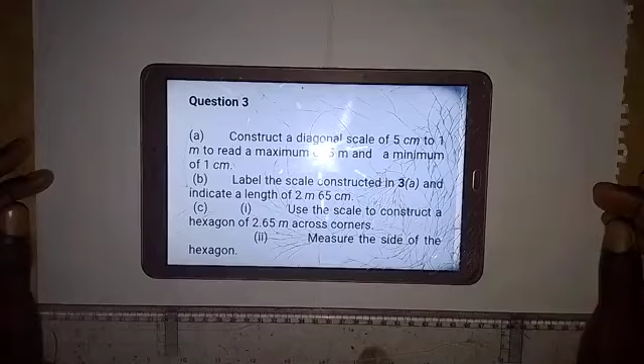B, and question C to answer here. Question A says construct a diagonal scale of 5 centimeters to 1 meter to read a maximum of 5 meters and a minimum of 1 centimeter. Question B says label the scale constructed in A and indicate a length of 2 meters 65 centimeters. Question C, Roman figure 1, says use the scale to construct a hexagon of 2.65 meters across corners. Roman figure 2 of question C says measure the side of the hexagon.

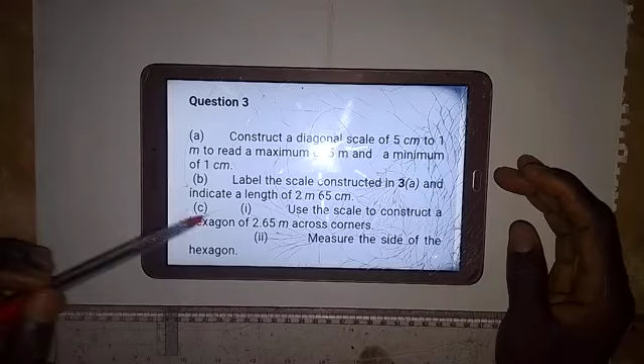Alright, so these are the questions that we are going to be working on. We have to start with question A, so that whatever we do here in question A, we are going to use to answer question B and question C together.

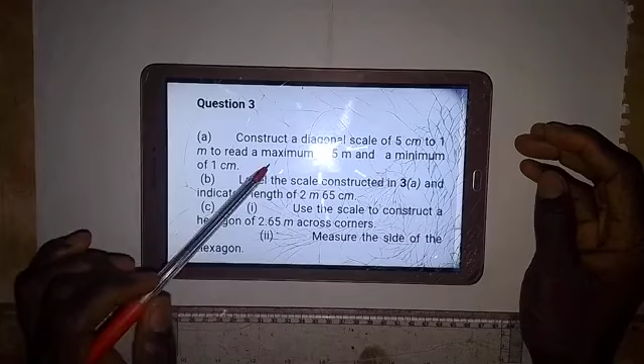Question A, as we have here, we have to construct a scale of 5 centimeters to 1 meter. So it means that we are using 5 centimeters to represent 1 meter. Then we need to determine the length of the scale. As we have here, the maximum reading that we have to have on the scale is 5 meters.

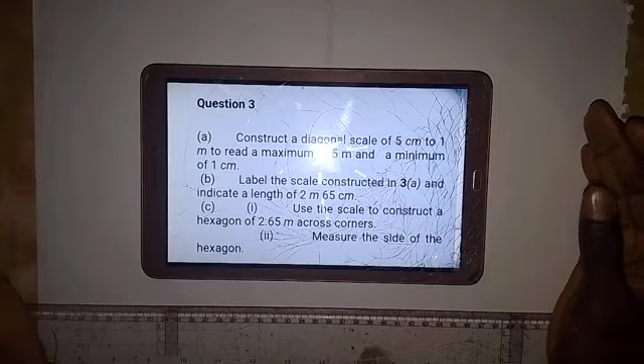So for every 1 meter, we are representing it with 5 centimeters. So what does that imply? Length of scale is 5 centimeters times 5. So if 5 centimeters is representing 1 meter, the length of scale will now be 5 centimeters times 5, which will give us 25 centimeters. That is the length of scale. That's the first thing that we are going to make use of.

So let's start and see how this construction can be done. The first thing that we are going to do is draw a horizontal line. So we have this horizontal line here. On this horizontal line, I'm going to draw a vertical line. Just move away a bit and draw a vertical line around here. So we have a vertical line here. We need this space on this side, so we draw this vertical line.

On this horizontal line, I'm going to take a measurement of 25 centimeters, using this set square to take the measurement. So this is 10 centimeters, that is 100. But we are using centimeters in this case, as the length of scale is 25 centimeters. From this point we also have another 10 centimeters, so that's 20 centimeters. Then I will take a measurement of 5 centimeters in addition to these 20 centimeters that I've taken, so this is 5 centimeters here.

I need to extend this line, so we extend the line. The total length here now is 25 centimeters, which is the length of scale. As I've said, we are using 5 centimeters to represent 1 meter, and we are told the maximum reading should be 5 meters. So if we are representing each meter by 5 centimeters, the length of scale will be 5 times 5 centimeters, which is equal to 25 centimeters. So that's what we have here.

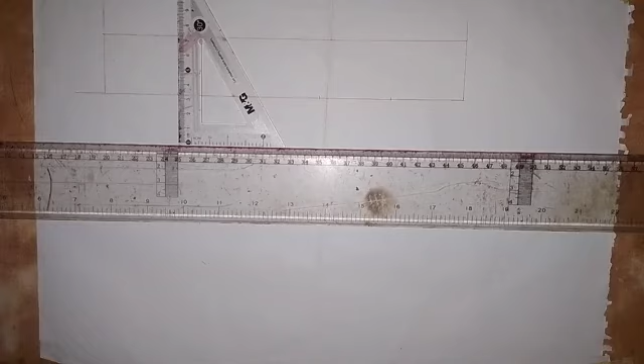At this point here, I'm going to draw a horizontal line from here to this end. So we have formed the rectangle as you can see here, and on each of these points I'm going to erect a vertical line. I will be making it a thick line on each of these points.

So we draw a vertical line here, and then coming to this point, I'll also draw a vertical line at this point. Okay, so we have this. Then at this point I will also draw a vertical line. Okay, then coming to this point, we also draw a vertical line here.

Okay, so now we are going to number each of the points, but the first one that we have here, we are going to make it 0. Then you write 1 here, so this is 2. Then this is 3, and here we have 4. All right, so this is how we are to number it. The first division, you put 0 there, and you number the rest as I've done it here.

So each of these divisions that we have here represents 1 meter, as we are told that we are using 5 centimeters to represent 1 meter. Now the next thing that we are going to do is divide this into 10 equal parts, because the highest unit is meters. Then before meters we have decimeters, and before decimeters we have centimeters.

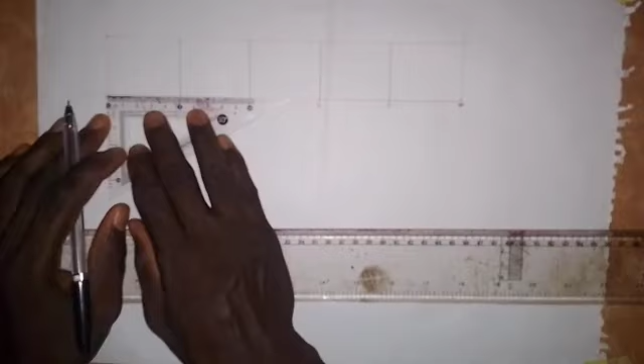So just look at what I'm going to do here. We are going to divide this 1 meter into 10 equal parts, because 10 decimeters is equal to 1 meter. So we divide this 1 meter into 10 equal parts. Don't forget that we have 5 centimeters here, and this 5 centimeters represents 1 meter.

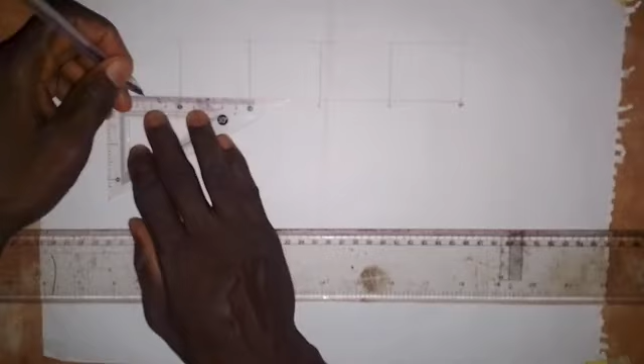So if we divide 50 millimeters by 10, that will give us 5 millimeters each. So this is 1, this is 2, and then we have 3 here, this is 4, this is 5, this is 6, this is 7, here is 8, here we have 9, and this is 10.

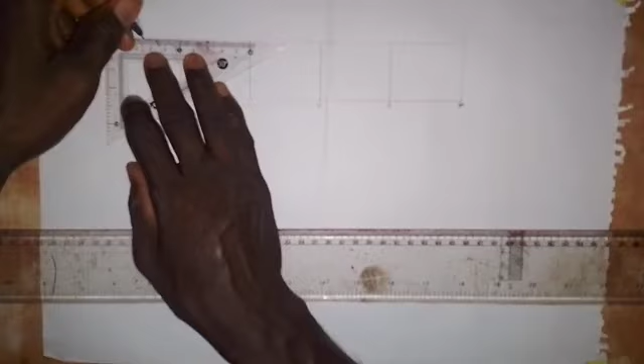Because we are constructing a diagonal scale, we also need to do the same thing up here by dividing this into 10 equal parts. So this is 1, 2, 3, 4, 5, 6, 7, 8, 9, and then we have 10. So this is a diagonal scale.

So what we are going to do now is connect this point 1 up here with 0 here, so that makes it a diagonal scale. So we draw a line from here to here. And I will now connect these 2 with this one here, like this. Then we come to this point and connect these 2 points together, so it has to bend, like a diagonal on a rectangle.

Then we also connect these 2 points together like this. Then we connect these 2 points, and these 2 points, and these 2 points, and lastly we connect this point together with this point. Okay, so look at what we have. This is what makes it a diagonal scale.

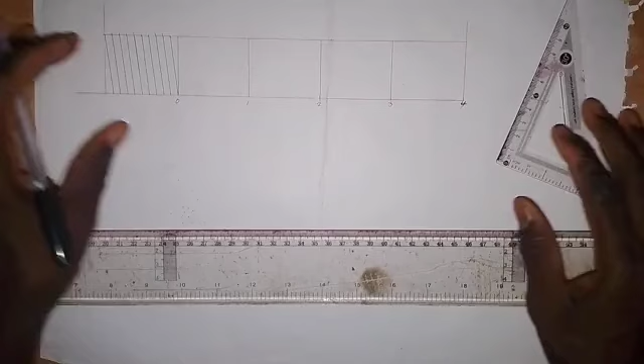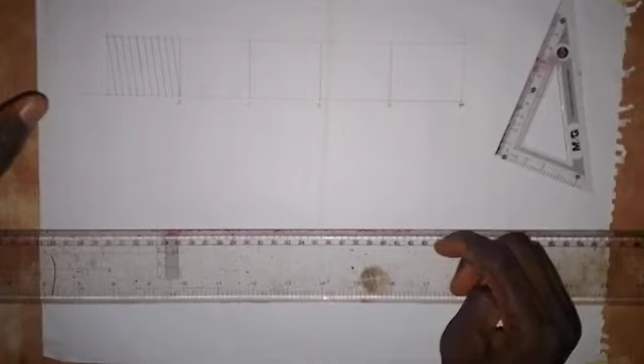The next thing is that we now need to create the centimeters part. This part here is for meters, while this one is for decimeters. Now we want to create that of centimeters here, as we know that 10 centimeters is equal to 1 decimeter. Since we took 40 millimeters or 4 centimeters here, we are going to divide it into 10 equal parts so that we can have centimeters on this part.

So 40 millimeters divided by 10 will give us 4. So I'm going to take a measurement of 4 millimeters each. This is 4, then 8, then 12, then 16, 20, 24, 28, 32, and 36. All right, so we have divided it into 10 equal parts.

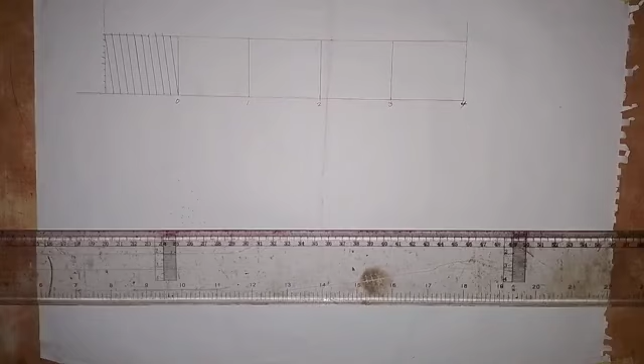So the next thing that we are going to do is draw a horizontal line through each of these points.

So through each of these points, we draw a horizontal line. So we take a horizontal line from this point to this end here. And then from this point, we also draw a horizontal line to this end. Then we come to this point. We also draw a horizontal line from here to this end here, and we do the same thing for this.

Draw a horizontal line from here to the end, and then here we draw a horizontal line from here to the end here, and then we also draw a horizontal line here, from here to the end. Okay, so we go on. So we draw a horizontal line from here. And then next, we draw a horizontal line from here. And then coming up here, we also draw a horizontal line from here to the end.

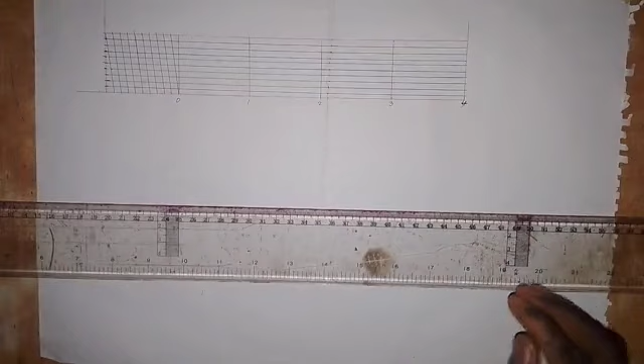Alright, so we have the centimeters part here. I'm going to make this line a thick line, because this is the major length or scale that we are given. Okay, so we have it like this.

Then numbering this one now, this is 0, this is 1 and 2, so I will put 2 here. Then 3, 4, I will put 4 at this point, and then 5, 6, I will put 6 here, and 7, 8, I will put 8 at this point, and this is 10. On this also, this is 1 and this will be 2. I'm going to put 2 here, 3, 4, so I'll put 4 here, and 5, 6, I'll put 6 here, 7, 8, I'll put 8 here, and then we have 10 here.

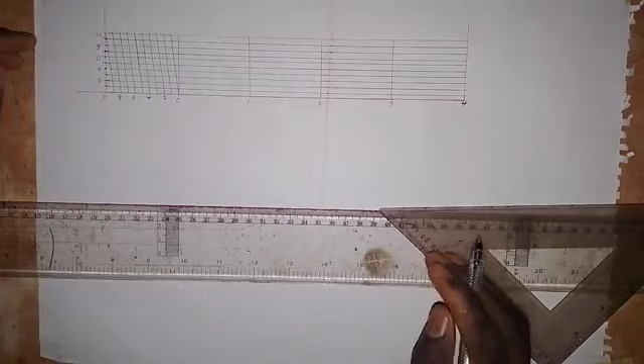Next, I have to write the unit on this scale. I'm going to write meter here, and then here we have decimeter, and here we have centimeter. I will do that while I pause the video, and when I'm done, you will see what I've done. Alright, so here I've written the unit. Here we have meters, this is decimeters, and we have centimeters here.

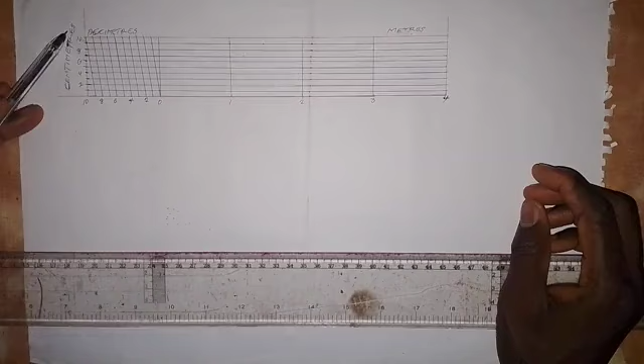Now let's answer question B. We have answered question A by constructing this diagonal scale. Question B says we are to label the scale constructed, and then we are to indicate a length of 2 meters 65 centimeters. So we have labeled the scale. What we have to do now is to indicate a length of 2 meters 65 centimeters.

It's very simple. This is 2 meters here, where we have this 2, as I said each of these represents a meter. So this is 2 meters here. Now we look for 65 centimeters. That's going to include these decimeters. So we are going to count from here.

6: 1, 2, 3, 4, 5, 6. When you get to this 6, you now go up on centimeters to count 5. So we have 1, 2, 3, 4, 5. This is where we have 5. So we are going to take note of this point by shading it, just put a visible dot on this.

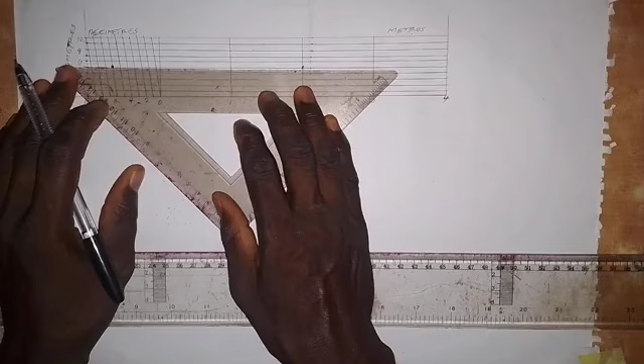What I'm going to do now also, by following this line, I will also take note of this point, as we have it here. Now I'm going to make this line a more visible, thick line, to show the distance of 2 meters 65 centimeters on this scale. So this is what we have here now.

So that is the distance. Then I'm going to write it on it. This is 2 meters, 65 centimeters. So we have to write it here. So we have indicated that distance or that length as we are told.

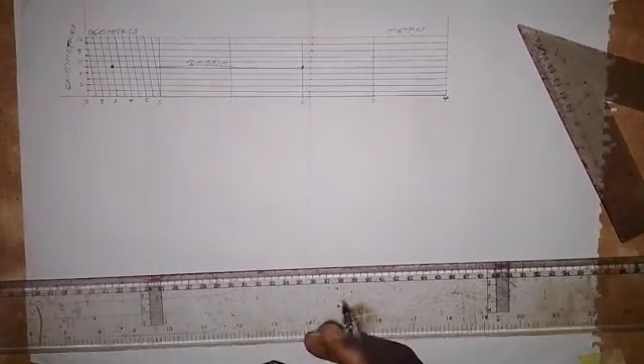All right, so we have answered question A and question B. Question A is for us to construct the scale, while question B is for us to label the scale, which we have done: meters here, decimeters here, and centimeters here. And part of question B is for us to indicate a distance or a length of 2 meters 65 centimeters, which I have done here.

Now let's move to question C, which says we are to use the scale to construct a hexagon of 2.65 meters across corners. So the distance across corners is given as 2.65 meters. What we are going to do now is draw a horizontal line. So we are going to draw a horizontal line here.

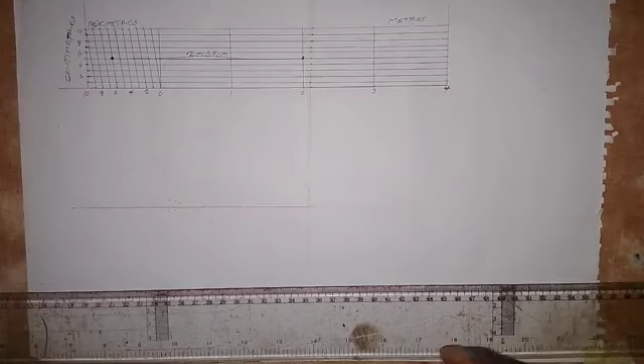So we draw a horizontal line. So this is the horizontal line as we have it here. The next thing that I'm going to do is take this distance so that we can transfer it here, because that's going to be the distance across corners that we are given. So I'll take this distance. This distance is 2.65 meters.

So here I'm going to put it somewhere here, then I will make an arc on the line. Then bringing it back here to this point, I will also make an arc here. So I've transferred this distance from here to here. The next thing I'm going to do, before we can construct the hexagon, is bisect this distance.

Let's call it distance AB or length AB. That is the distance across corners of the hexagon. So I'm going to bisect it by putting the pinpoint of my compass here and extending the pen point of the compass. I will draw an arc up here and an arc down here, and then bring it to point B. I will also draw an arc up and down.

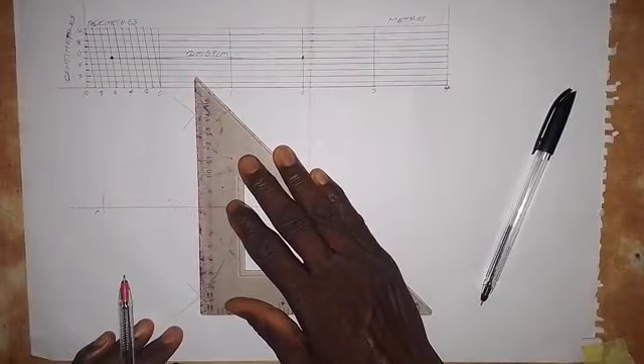So we have this. The next thing I'm going to do is draw a line through this point, that is the bisector of length AB. So I will draw this line like this. We have bisected the line. Next, if this is the center, I will call this point O. I'm going to put the pinpoint of the compass at point O and extend to B or A, which is the radius of the circle that will give us this hexagon.

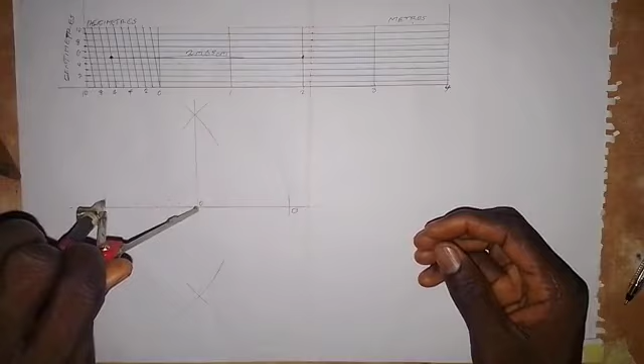So I'm going to draw a circle all around like this. The circle goes as we have it here. The next thing I'm going to do is take the radius we used to draw this circle and put it at point A here. I'll make an arc up and down. Then I'll also put it at this point and make an arc up and down. So we have this point.

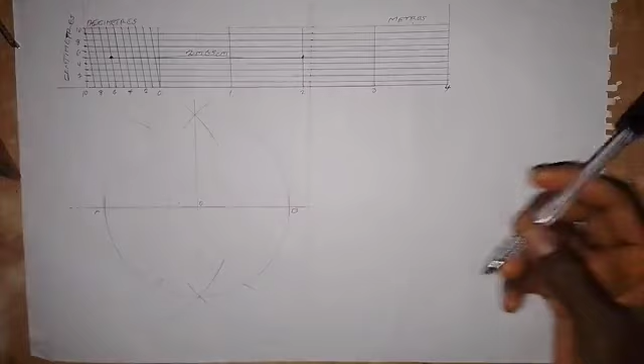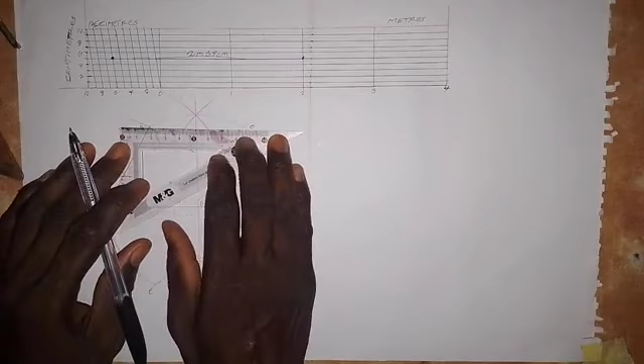I'll call this point C, this is point D on the circle, this is point E, and here we have point F. Then we form the hexagon by joining the points together. We join points A and D together, then we join points C and D together like this. Then we join points B and C together, so it goes like this.

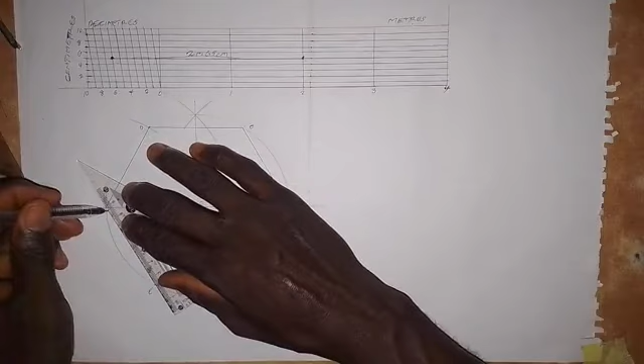Then points B and F, we join this together. Then we join points E and F together. That is another side of the hexagon, and then we join points A and E together. So we have formed the hexagon as you see here, whose distance across corners is equal to 2.65 meters. Now we are asked to measure and state the length of the hexagon.

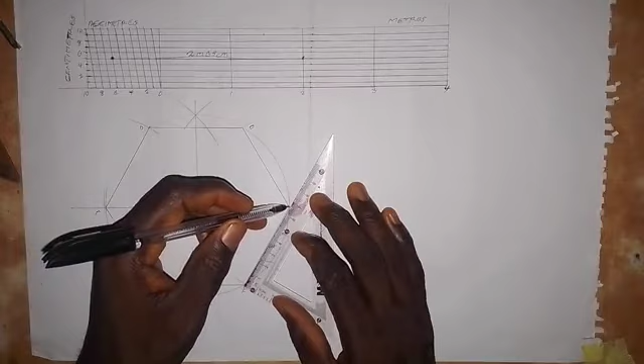If I take a measurement of this distance that we have here, it is 6.7 centimeters. So that's what we have here. Now we have to convert it to meters. As given in the question, 5 centimeters is equal to 1 meter. Then 6.7 centimeters is equal to how many meters? Let's find out.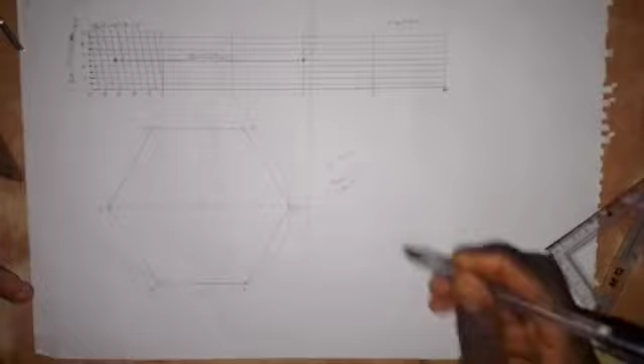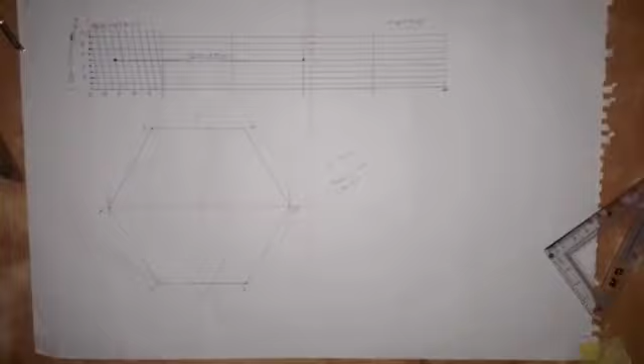I'm going to make use of a calculator; it's going to be 1 point something, but I'll quickly use the calculator to determine the answer. If we cross multiply, we divide 6.7 centimeters by 5. You know how to work that out. 6.7 divided by 5 gives us 1.34. So this is equal to 1.34 meters. That is the length of the hexagon.

So converting it to meters is as simple as I've done it here. All you have to do is practice, and when you practice this, you become a master at this work.